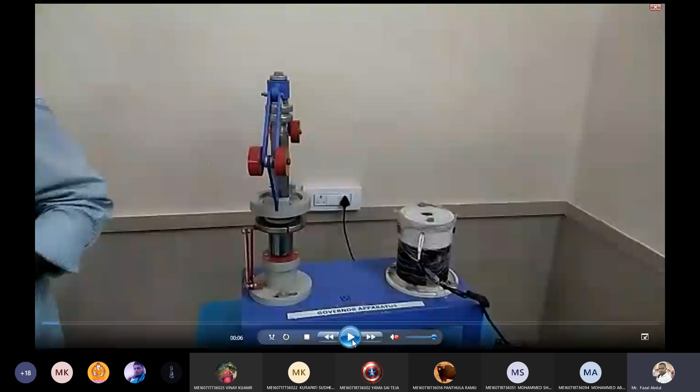So this is the total governor setup, Babu. In this governor setup, we are going to change the arms. So this is the arms, I will show you that.

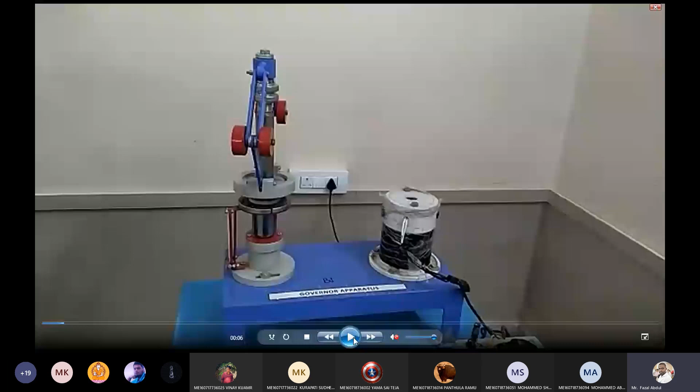So this is the deadweight type of governor. In centrifugal governor, there are two types: spring loaded governor and dead load type of governor. So this is a dead load type of governor, meaning there is no spring here.

So if we change these arms, replacing another type of governor, then the type of governor is going to change. If you attach a spring here, that becomes a spring loaded governor. So only this is constant, only these arms are going to change. So this entire thing is a governor setup.

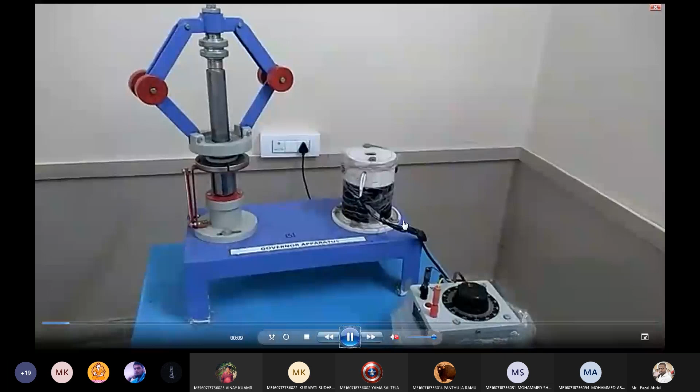These red colors are the balls of the governor. This is a spindle. This is the sleeve. The sleeve displacement, the vertical displacement of the sleeve, is going to be measured on the scale.

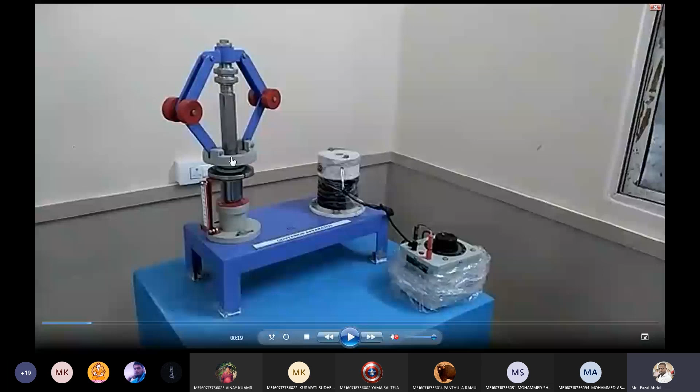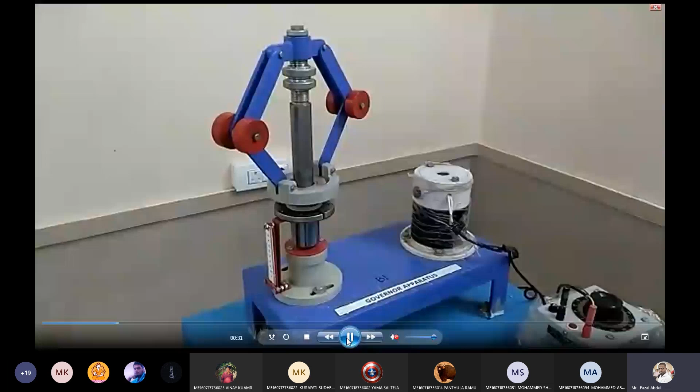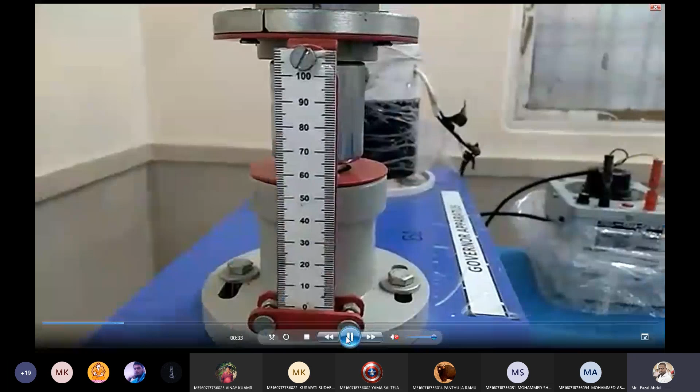The stopwatch is required here in the apparatus. So this is the graduated scale provided on one side of the setup. On the scale, we are going to measure the sleeve displacement, X value. So this is the sleeve, this is the spindle.

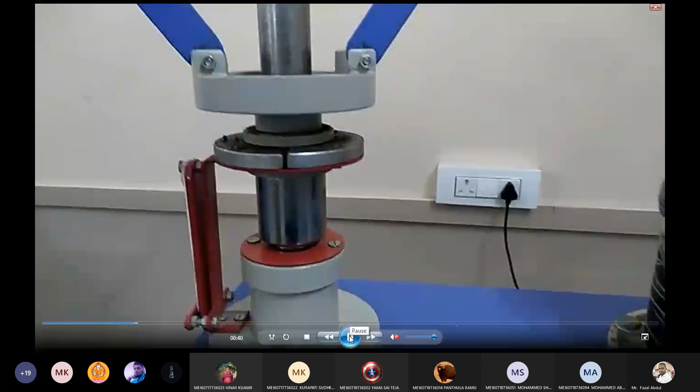So this entire mechanism is going to run. This is the electric motor, and this motor is connected to the governor setup through a belt mechanism. The belt is provided at the bottom of this table.

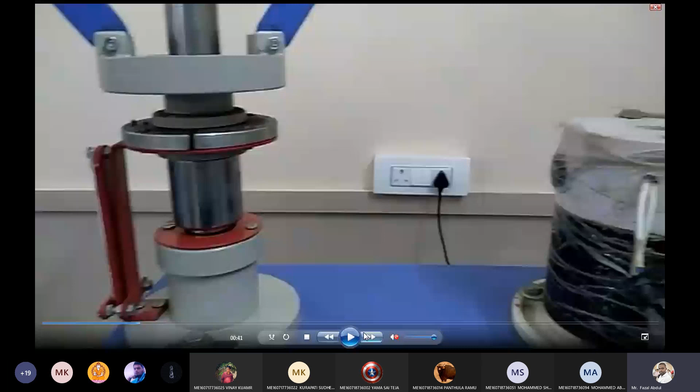This is a dimmerstat for electric supplying purpose. How much voltage and current we require, that much current is going to be supplied with this.

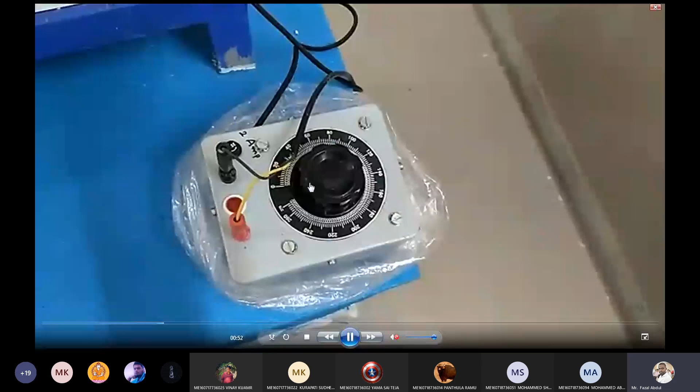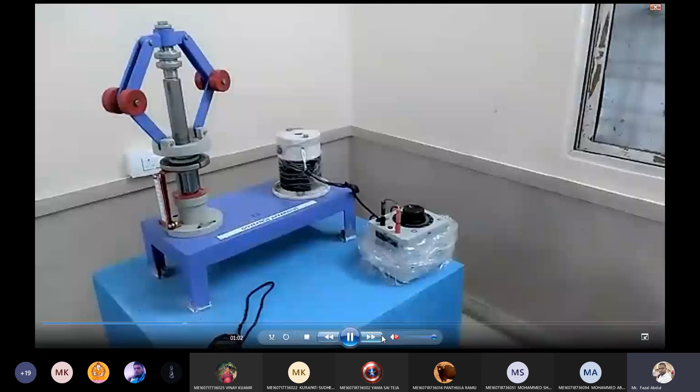Now this is a contact type of tachometer to measure the speed in RPM. These are all the apparatus required to conduct this experiment.

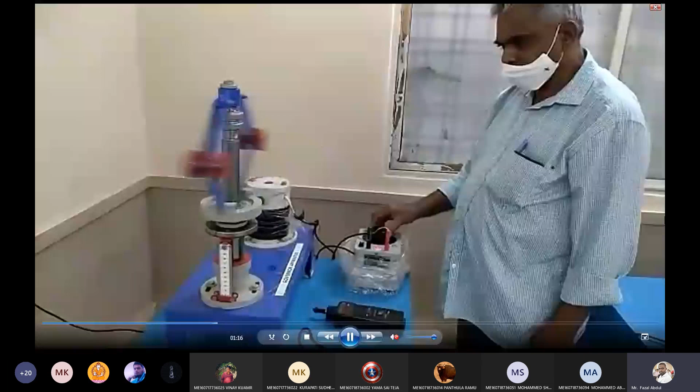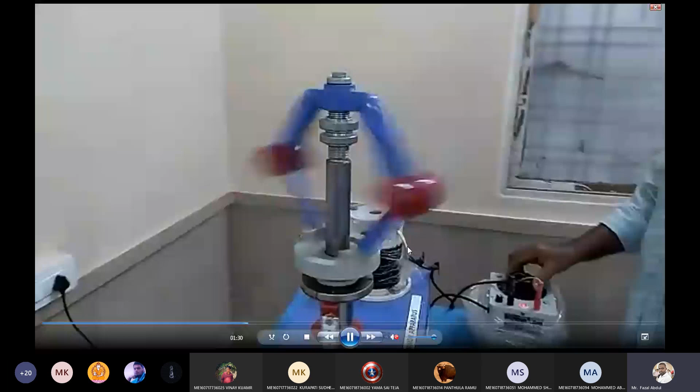So how it is going to work, see here. Whenever the speed increases, due to centrifugal force, the balls are going to move in the outward direction. Here, slightly increasing the speed, as the current increases, as the speed is increasing here, slightly see here how the sleeve is making displacement.

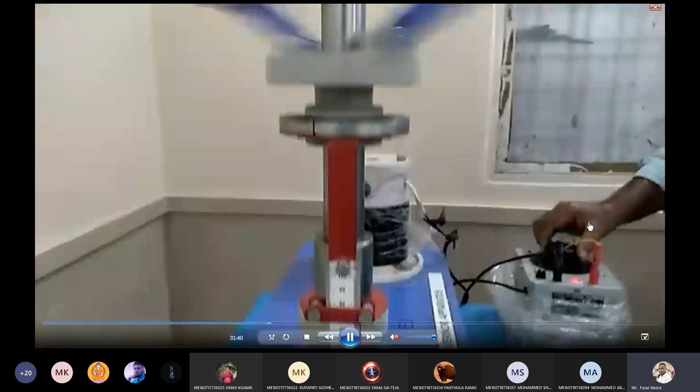As the current increases, the speed also increases due to centrifugal force. The balls are going to move outward. Because of that effect, the sleeve is going to lift up and down. So on the scale, we are going to take the displacement.

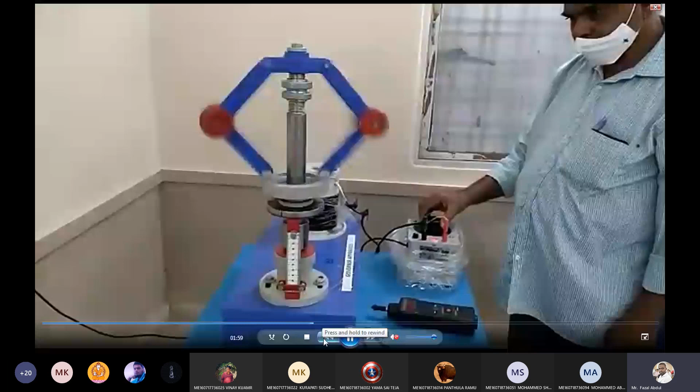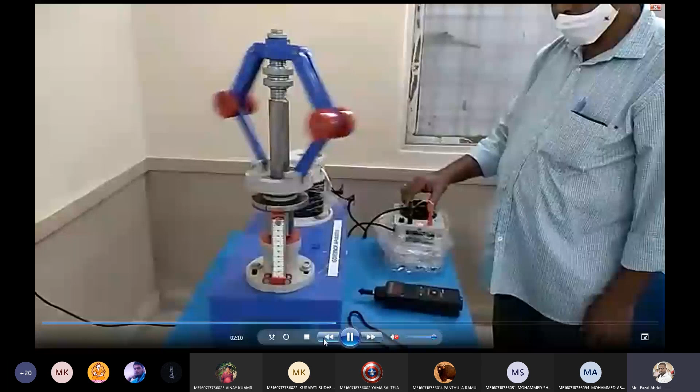Okay, now this is our experiment one: determination of the characteristic curve of Watt governor. So here, in this particular governor, we need to draw the graph by taking the readings.

After taking the readings, we have to do the calculations. After calculations, whatever answers we got, based on those values, we have to construct the graph: speed versus displacement, and centrifugal force versus radius, that graph is there.

Force versus... wait, I will tell you. Force, speed versus displacement, force versus radius of rotation. These two graphs we need to construct, but separately. Okay, after getting the answers, you need to construct the graph.

So, determination of the characteristic of Watt governor. This is the apparatus required: governor setup, speed regulator. Speed regulator means that dimmer, speed controller, and contact type tachometer we are using here.

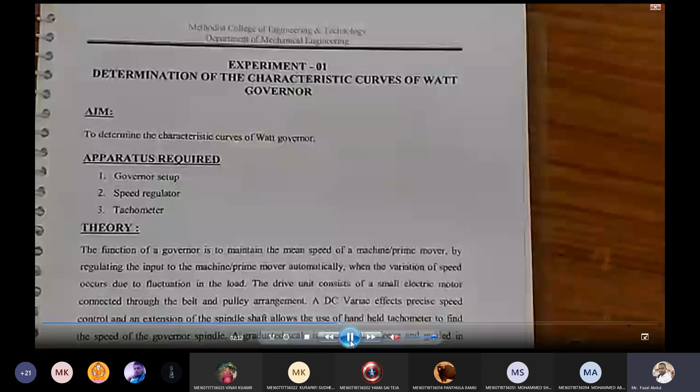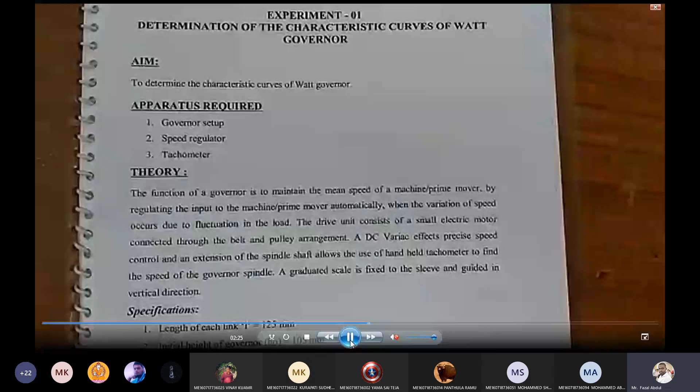These specifications are very important, Babu. In Viva questions, they may ask such type of specification. Length of each link is 125. Initial height of the governor H0 is 105. Initial radius of rotation R0 is 116 mm. Mass of each ball, the radial circular balls I showed, that is the balls. Mass of each ball is 0.5 kg.

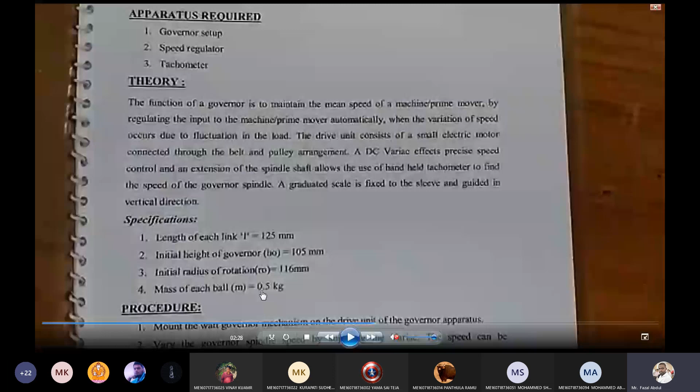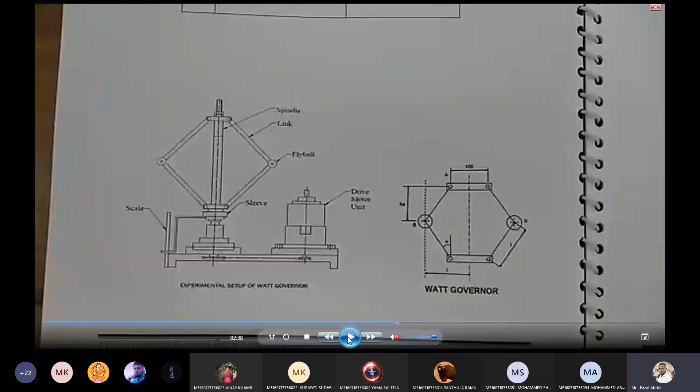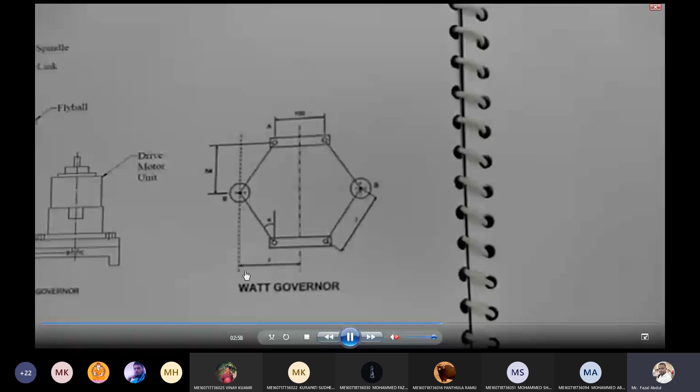So see here, this is the length of the arm. H0 is the initial height of the governor. So this is the initial radius of rotation R. Length of the arm, H0 is the height of the governor.

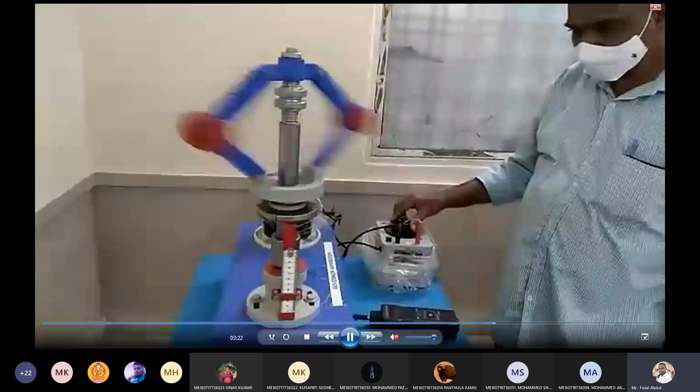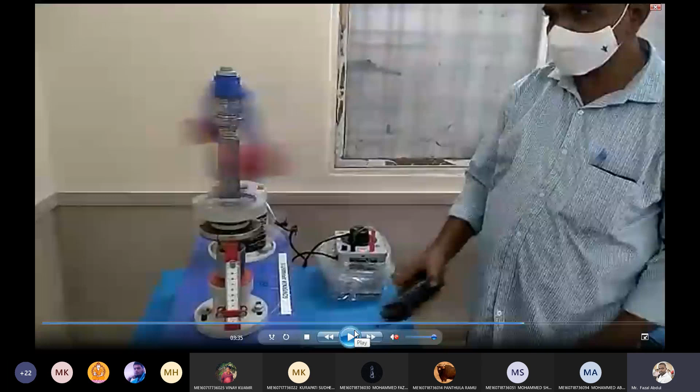At the initial stage, give somewhat voltage, supply somewhat current. So observe this machine how it is working. As the speed increases, the sleeve slightly increases upward, meaning displacement. Wait for a few seconds to get the total mechanism to stable condition. Then take the tachometer and measure the speed.

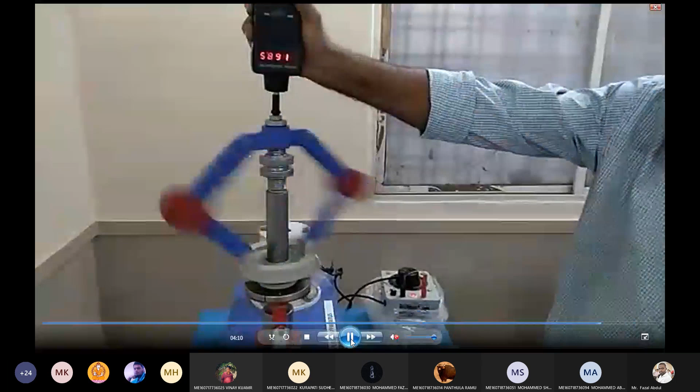So the speed was 168. Note down in your papers. Draw this type of table: serial number, speed in RPM, sleeve displacement X in mm. Draw a table on your papers.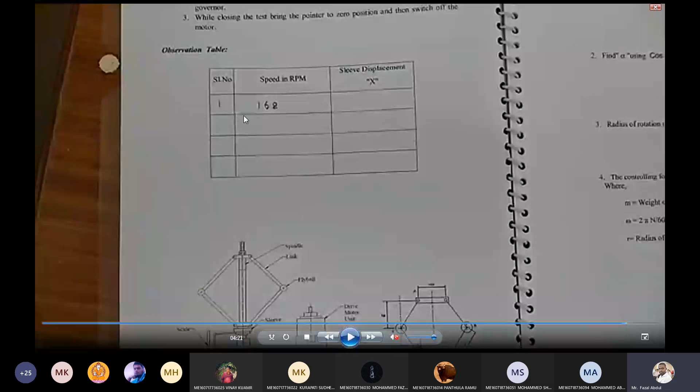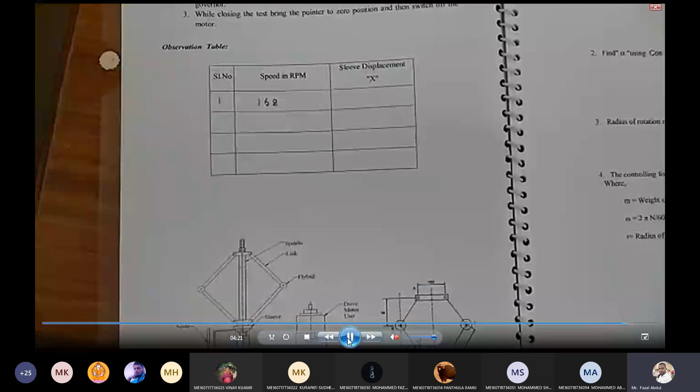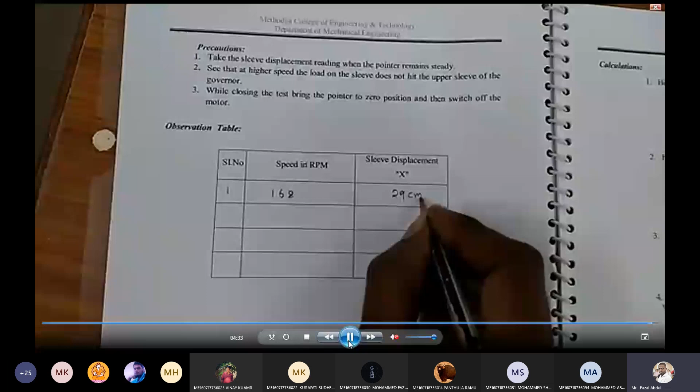Now the first speed was 168 RPM. For the respective 168 RPM, what is the sleeve displacement? Here I'm writing, note down. Okay, centimeters. For 168 RPM, note down 29 centimeters.

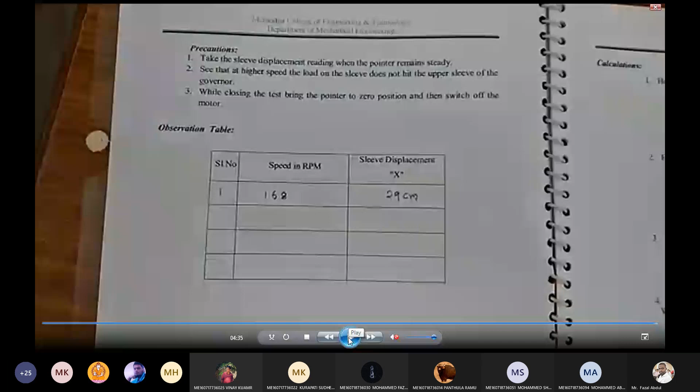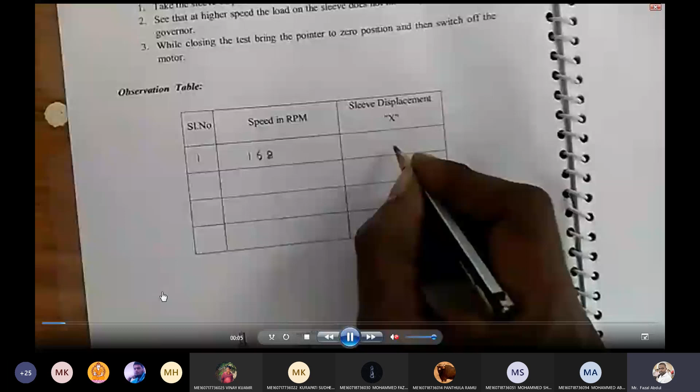Sorry, 29 centimeters, that was wrong. We make a correction, 33 centimeters. Actually 33 mm.

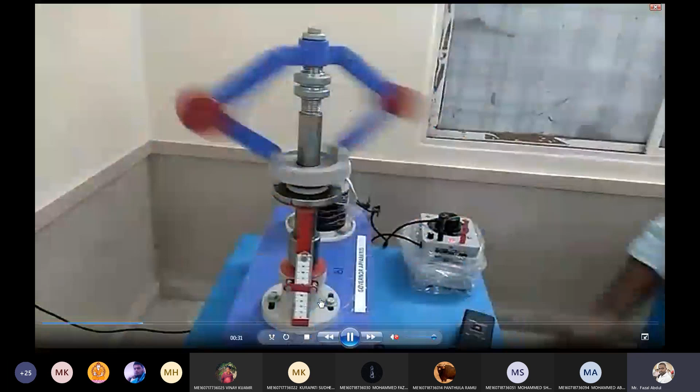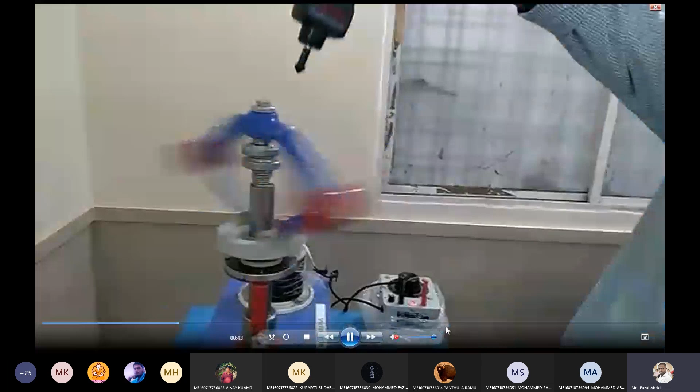Now second time, increase the speed, increase the voltage more than the first time. So as voltage increases, speed of the machine also increases, and respectively sleeve displacement also increases. Take the tachometer, and after increasing, wait for few minutes to get the whole machine stabilized. Then take the readings with the help of this tachometer.

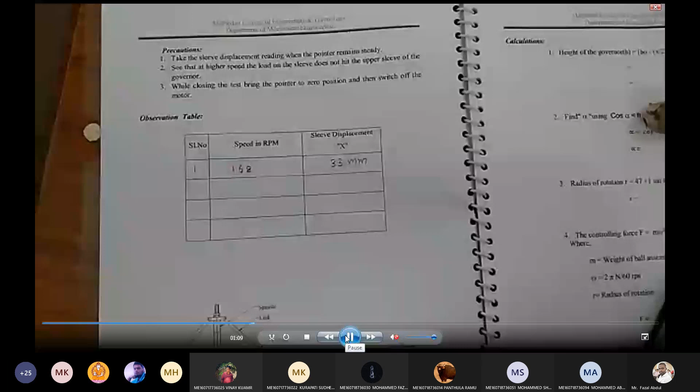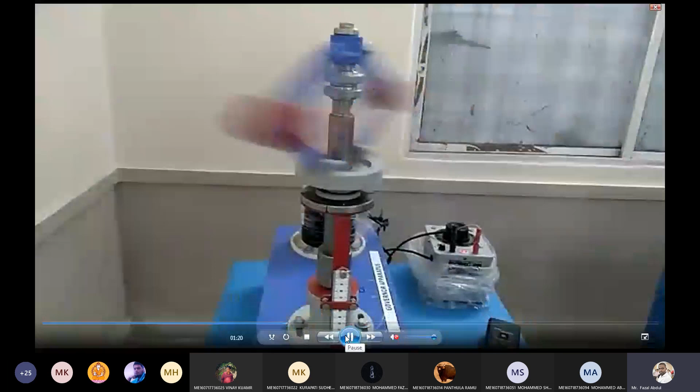Now what is the speed? Note down 193. What is the speed? 193. Now respective sleeve displacement, how much? See on this graduated scale, the displacement here is 65, here 65 I think.

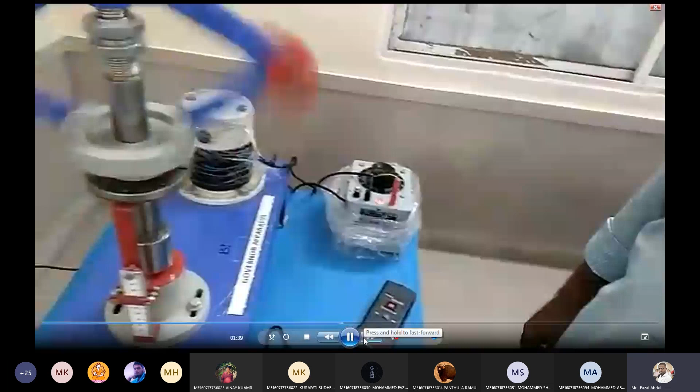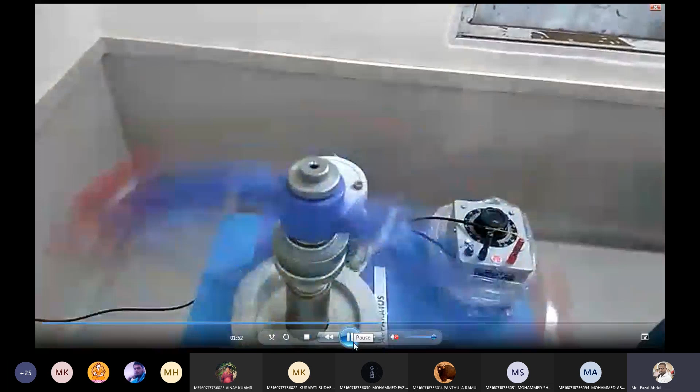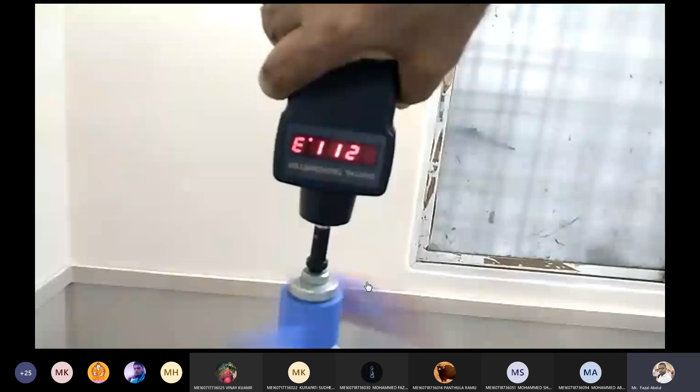Now third time, increase the voltage and speed also will increase. Measure the speed after getting stabilized. How much the speed? 209. So for 193 RPM, 65 mm displacement.

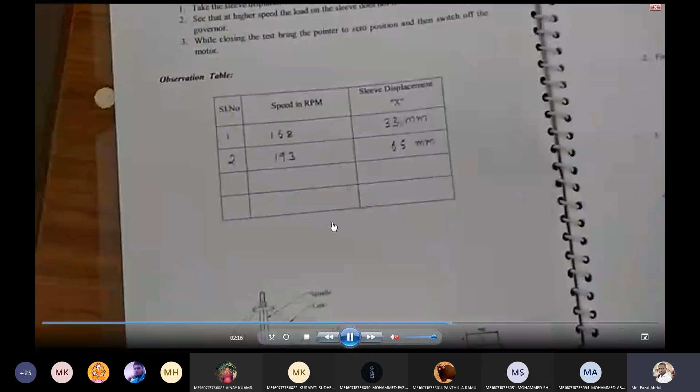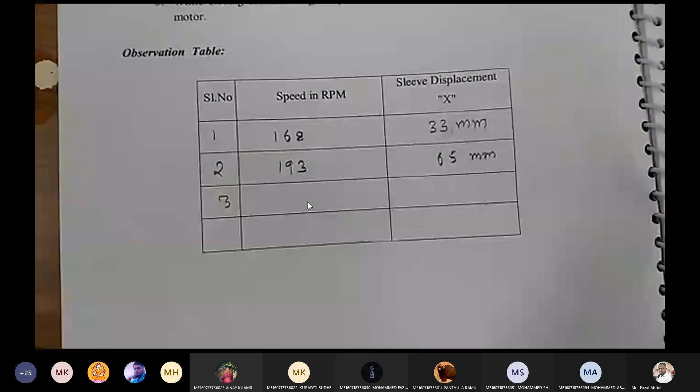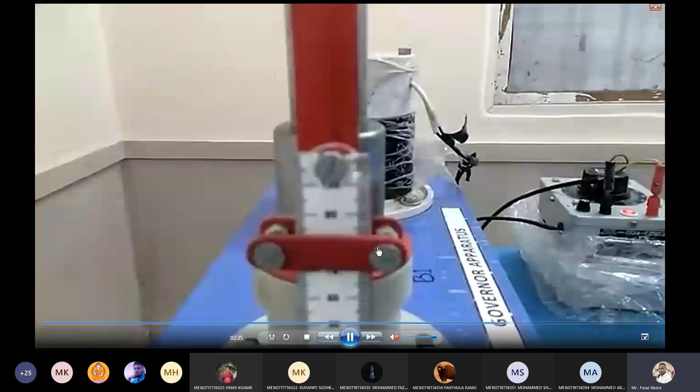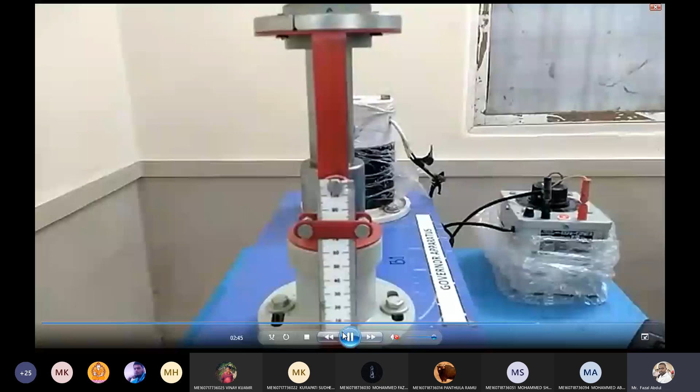Now the third one, the RPM is... what is the sleeve displacement? The sleeve displacement, see here: 60, 75 or 78. Sorry, 81 mm.

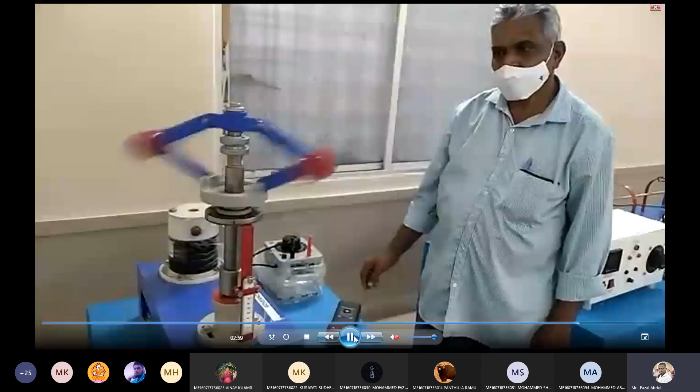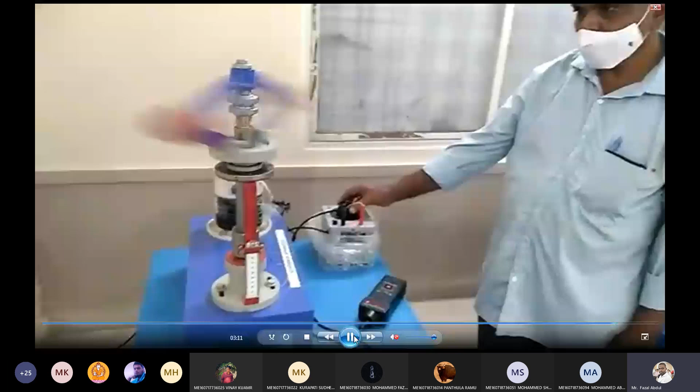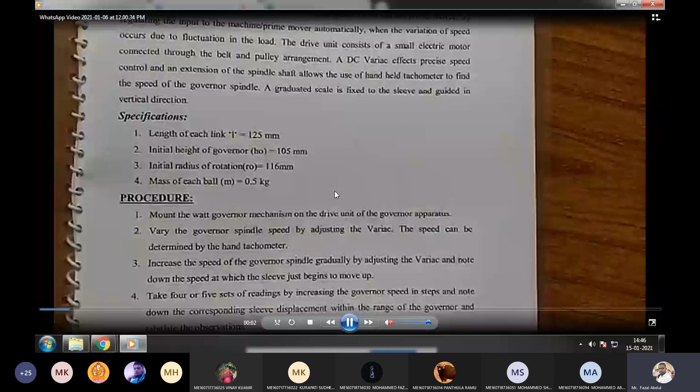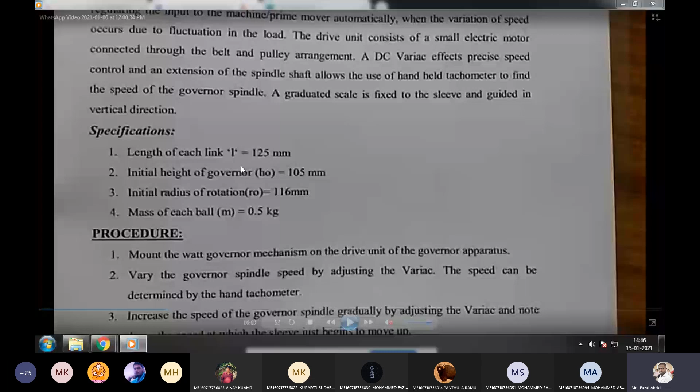Now take down these specification values, length of each link, write in your papers. Length of each link L is equal to 125 mm. Initial height of the governor H naught is 105 mm. Write it on your papers. Initial radius of rotation 116 mm. And mass of the ball is 0.5 kg. Write it in your paper.

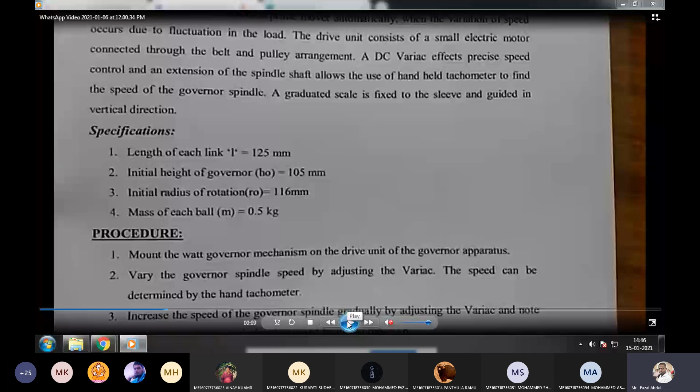So height of the governor H equal, substitute the H naught value here. For the first time, H1, you have to write H1 equal H naught minus X1 by 2. For second time you are calculating height of the governor, H2 equal H naught minus X2 by 2. For third time, H3 equal H naught minus X3 by 2. So like that, calculate H1, H2, H3.

In the same manner, calculate the alpha 1, alpha 2, alpha 3 angle: H1 by L, H2 by L, H3 by L. In the same manner, calculate the radius of rotation R1, R2, R3. R1, R2, R3 means 47 plus L into sine alpha. L is the length of each link. Alpha, just now we calculated, alpha 1, alpha 2, alpha 3.

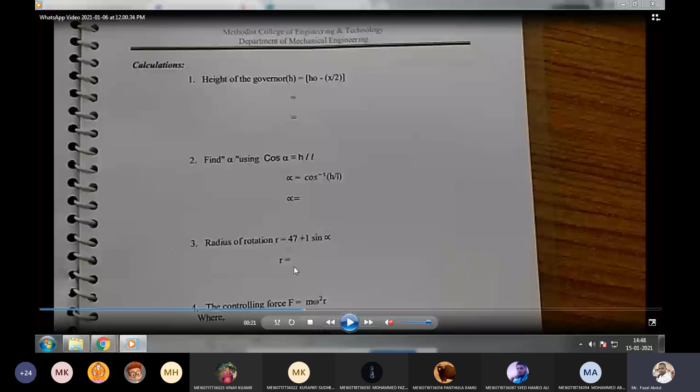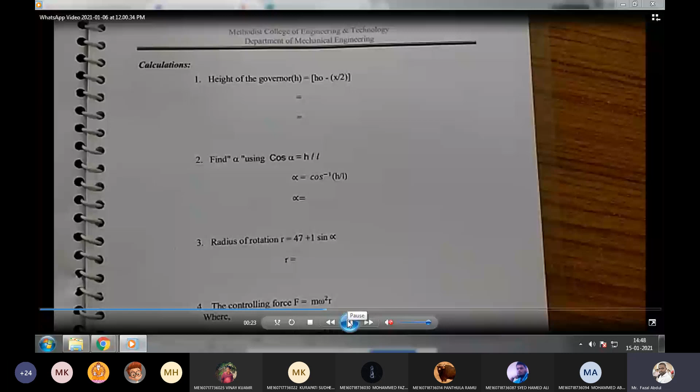So substitute the respective values, get the value. For suppose you are calculating R1, 47 plus L into sine alpha 1. For R2, 47 plus L into sine alpha 2. Okay, like that you have to calculate. Now, after calculating this radius of rotation, the value of mass is 0.5 kg, sir.

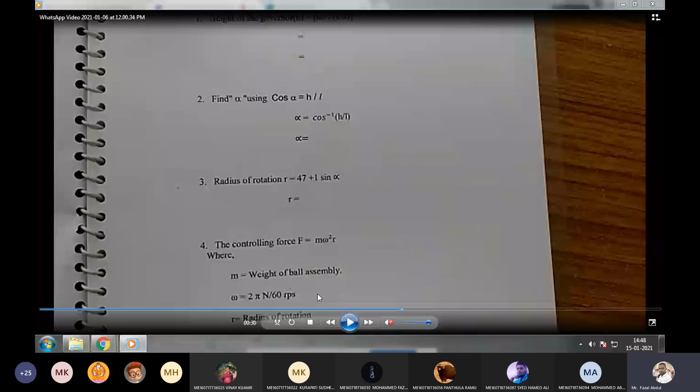After calculating the radius of rotation, calculate centrifugal force. F is equal to m omega square into r. Omega is angular speed, angular velocity, in radians per second. So that is 2 pi n by 60.

So omega 1 you have to calculate first, 2 pi n1 by 60. For omega 2 you are calculating 2 pi n2 by 60. Omega 3 means 2 pi n3 by 60. Different values for the different stages, you have to substitute omega 1 with n1, omega 2 with n2, omega 3 with n3, like that.

After getting omega 1, omega 2, substitute here, get f1, f2, f3. F1 equals m into omega 1 square into r1. F2 means m omega 2 square r2. F3 means m omega 3 square into r3. Like that, f1, f2, f3, three different values.

Do we take mass in kg or gram? Mass directly substitute in terms of kgs only.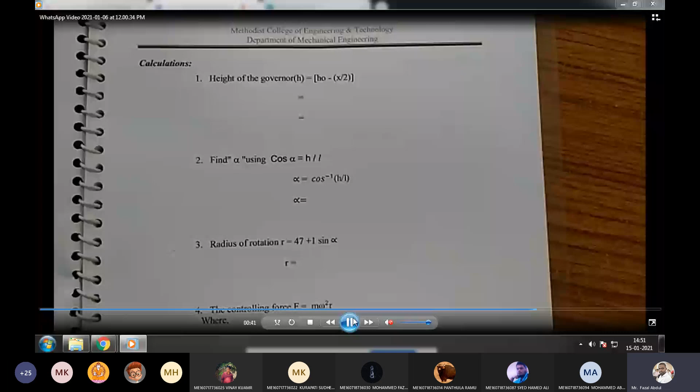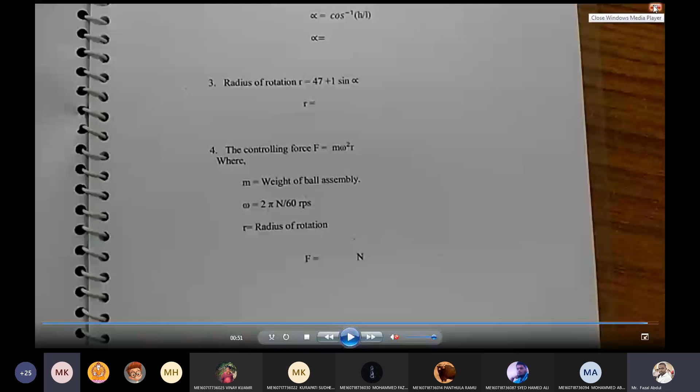Sir, yes sir, once explain how to calculate height, sir. Height, Amma, just wait. Yes sir. Wait.

This I uploaded as assignment. Is it appearing on my screen? Yes sir, yes sir.

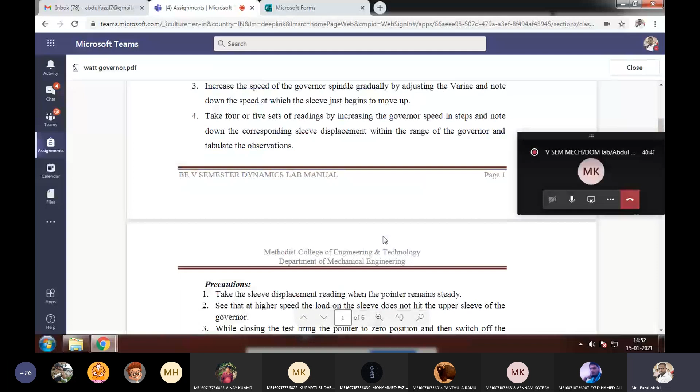Which one, Amma, you asked? Height of the governor, sir. Yes sir. You write the equation H1, because three readings we have taken N1, N2, N3, three displacements we got respectively. So for three different situations, we have to calculate three different values, it means H1, H2, H3.

H1 means H0 minus X1 by 2. H2 means H0 minus X2 by 2. H3 means H0 minus X3 by 2. X1 means first time displacement, X2 means second time displacement, X3 means third time displacement. Like that, you will get the three H1, H2, H3 values. Okay sir.

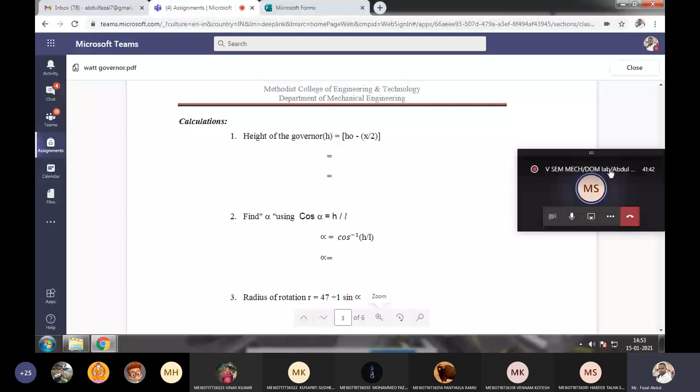So what is the initial height of the governor? That's the reason I told one thing, you make it, write it down. I did note down, but then... first write down the specifications. Initial length of each link L is equal to 125. Okay, done.